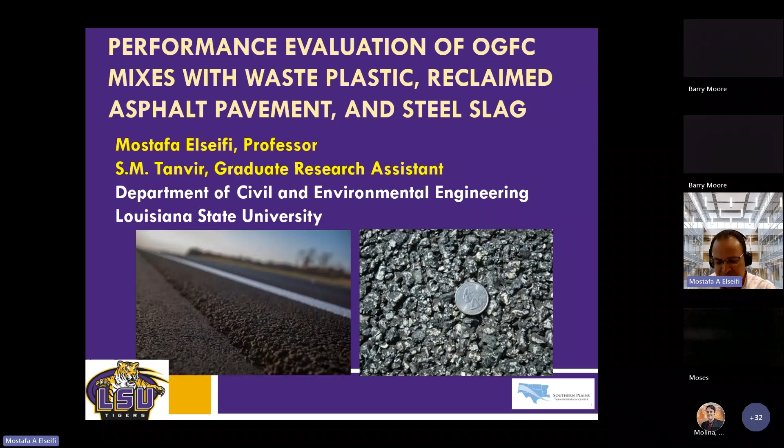To start with a little bit of introduction, OGFC has been around for quite some time. It has many functional benefits for the user. It drains the water very quickly, and it also reduces the noise from traffic. It improves the friction at the surface. It reduces the risk of hydroplaning. So many functional benefits for the user.

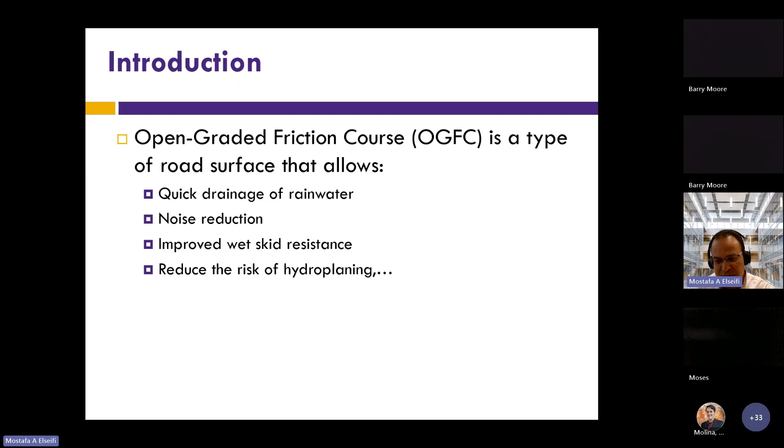However, in terms of performance, it does not last as long as regular dense graded hot mix asphalt. The reason is that we have a very high air void content. This air void content reduces the film thickness of the binder, which leads to premature raveling and stripping of the mix. Also, the high air void, even though it works very well at the beginning, tends to get clogged with dust and debris over time, which may reduce the permeability of the mix.

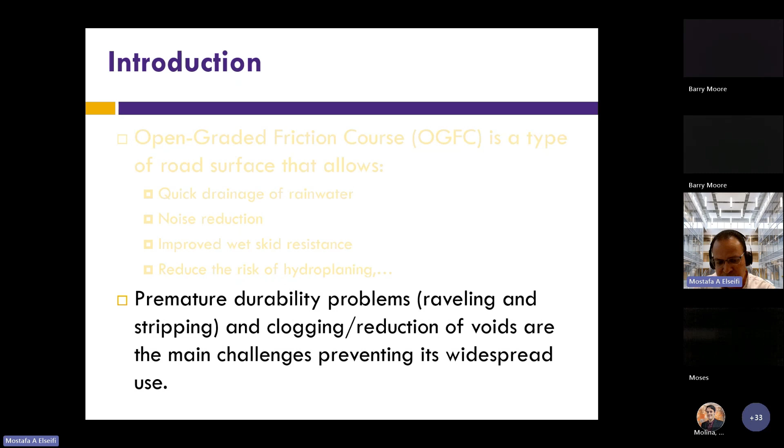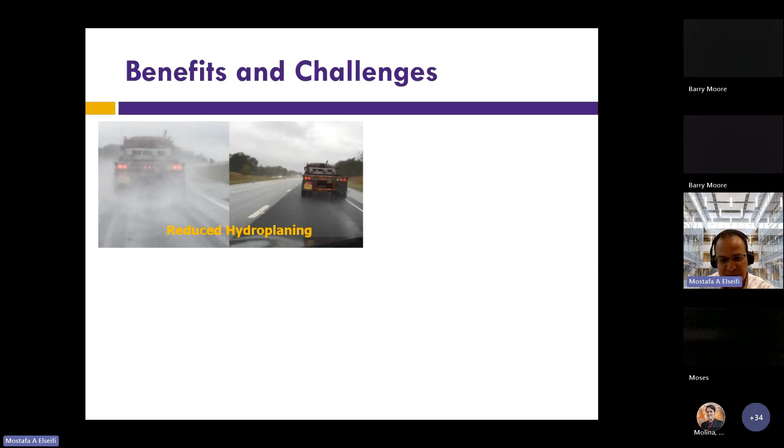So these are some pictures taken in Louisiana. You can see the benefit of OGFC in reducing splashing and hydroplaning, especially in the event of heavy rain, which we have very frequently in Region 6. Also, another study has looked at the amount of accident rates. You can see OGFC, shown in green, has a much lower accident rate than regular mix. So that's also an added benefit of this mix.

In terms of durability, these are examples of raveling of the mix. It's usually constructed with a very thin thickness, which again makes it very susceptible to raveling. We also have seen in the literature early top-down cracking from this mix. So it has a lot of performance issues, and we cannot really argue about that.

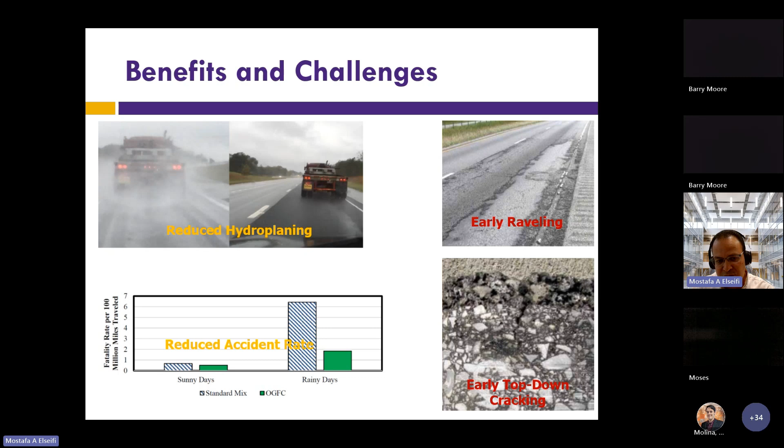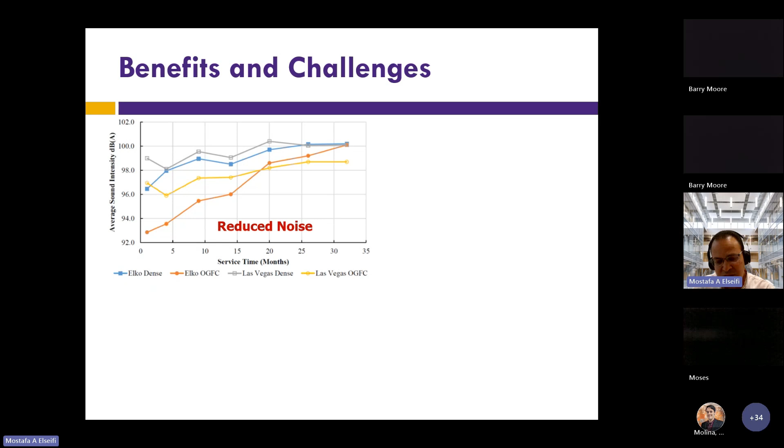In terms of reduction of noise, this study was done in Nevada. You can see the very clear reduction in noise, which again is a very important issue, especially in urban areas.

As I said, the cost of OGFC is higher than dense graded mix. This is mostly due to the higher asphalt content, and again, this is also an issue that we are going to discuss in this presentation.

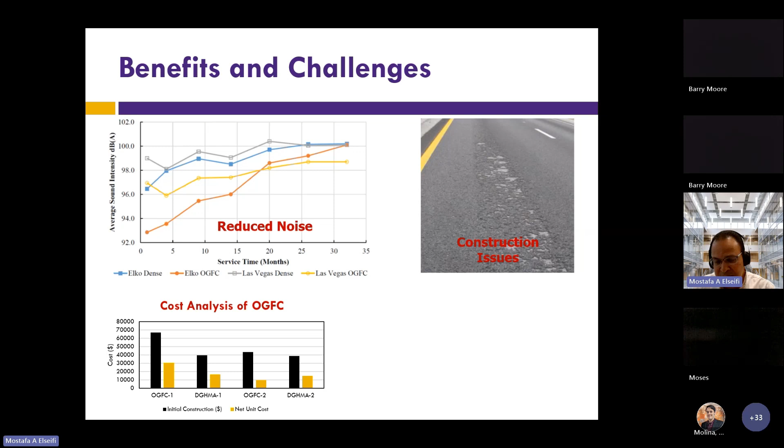In terms of construction, again, the mix is very thin, and you can end up with some problems after construction. This requires a very skilled contractor that has experience in constructing and compacting this type of mix.

And again, the reduced permeability was looked at in the literature. You can see it does decrease over time, mostly due to debris and dust in the air void, and also because of the consolidation that happens to the mix over time.

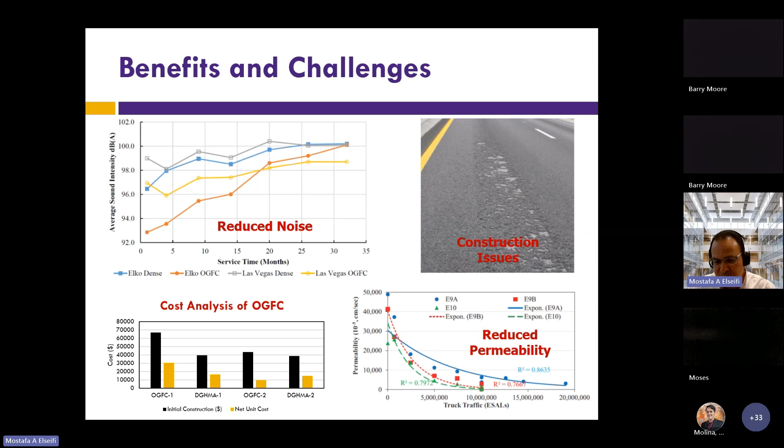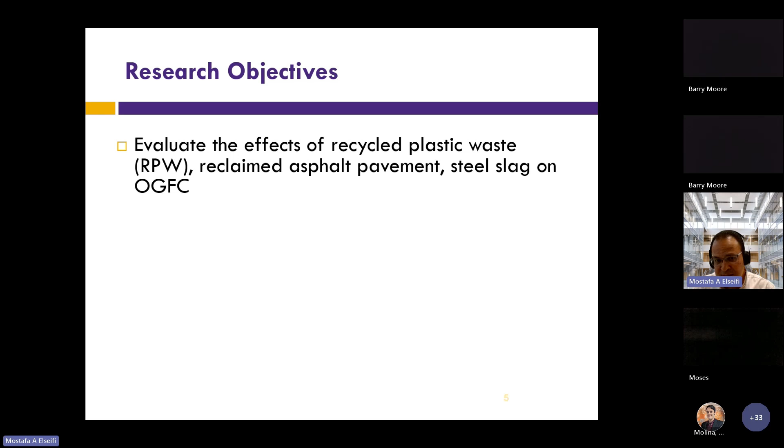Our objective was to look at innovative methods to reduce the cost while improving the performance of this mix. We looked at the incorporation of recycled plastic waste, reclaimed asphalt pavement, and steel slag. We also looked at the use of high polymer modified asphalt binder and hydrated lime, which we use as a slurry in the mix. As part of our state's practice, and I'm sure other states in the region, none of these additives are currently allowed or used in OGFC.

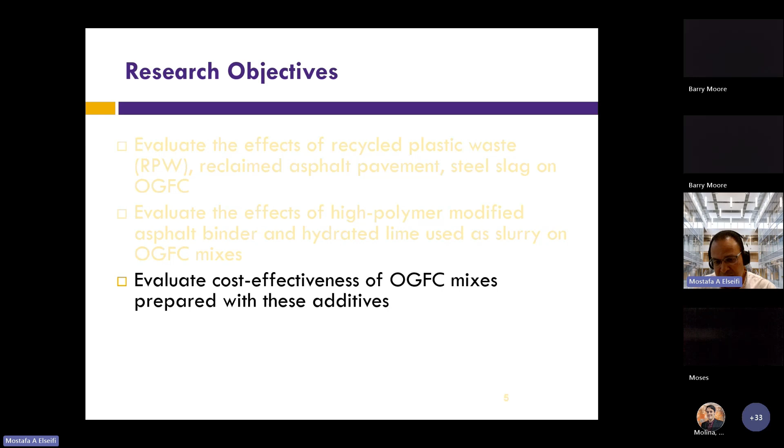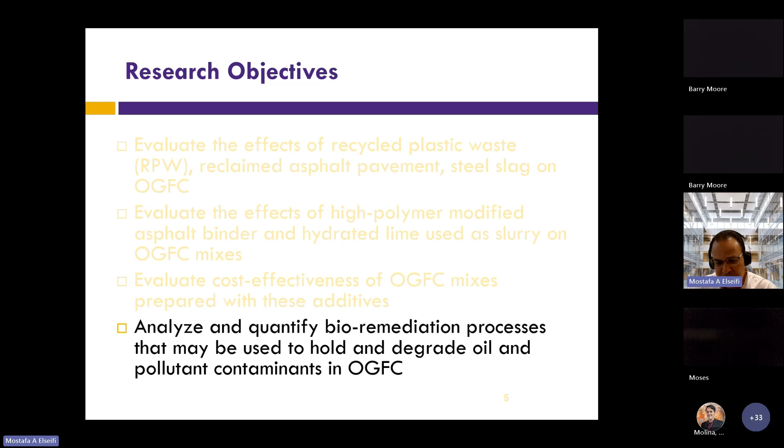Then we looked at the cost effectiveness. After we assessed the performance, we looked at cost effectiveness, which is a very important issue when dealing with mix production and construction. We also looked at this because it has been claimed that OGFC can degrade pollutants. So when you get pollutants in the mix, can it help degrade them? For example, when you have motor oil on the surface, can OGFC help with this type of contamination? I'm going to show you the results.

For the methodology, we started with a literature review, which I'm not going to present here due to time constraints. Then we selected the material, based on a wide range of attempts, so I'll just show you the final product. Then we designed and prepared the mix, did the laboratory testing, performed the performance analysis of the results, and also did the cost analysis.

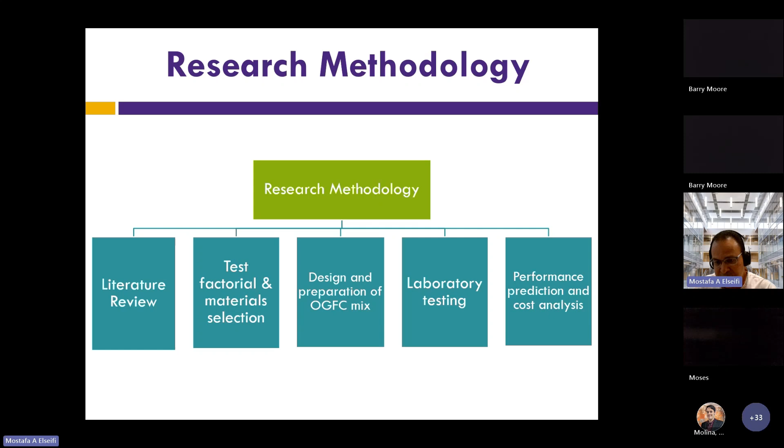The mix that we used was provided by the Louisiana Department of Transportation and Development. This is a mix that is actually approved by the department and has been used in roads. It's a mix that has been designed and approved.

Some of the features I'm highlighting in red: the nominal maximum aggregate size is 12.5, which is what we currently use in the state. We have two sources of aggregate, so it's a very simple mix design, but it meets the specification.

We use PG 76-22M, which is polymer modified, at 6.5% content. We have fiber to reduce drain down. We also use ZycoTherm, an anti-stripping agent, which also has other benefits for the mix. You can see that the air void of the control mix was 22.6. In Louisiana, we require an air void of 18 to 24, which is tremendously high compared to dense graded hot mix asphalt.

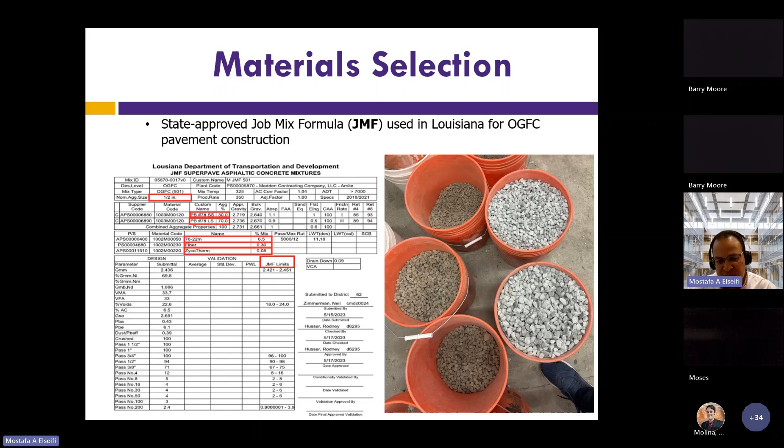The additives that we used: we used recycled plastic waste, which you can see in the picture here. It's high density polyethylene, and we replaced it at a content of 3.75% of the total weight of the dry aggregate. This has not been attempted before in OGFC, so it was something new for us.

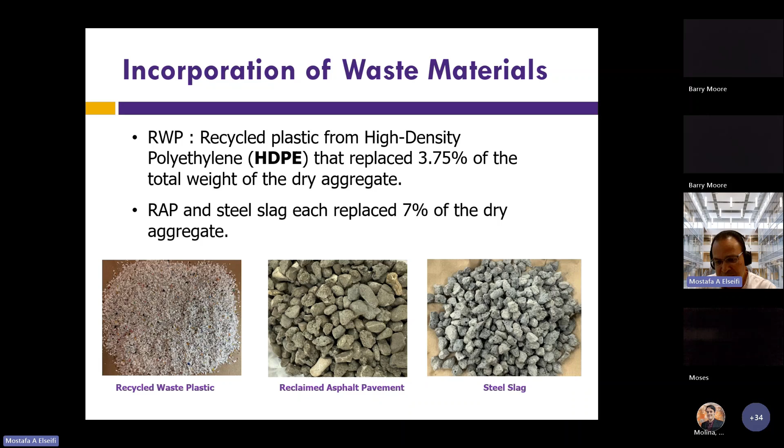The reclaimed asphalt pavement, or RAP, you can see in the picture here. We use it at a content of 7%, and we also use steel slag at 7% of the dry aggregate.

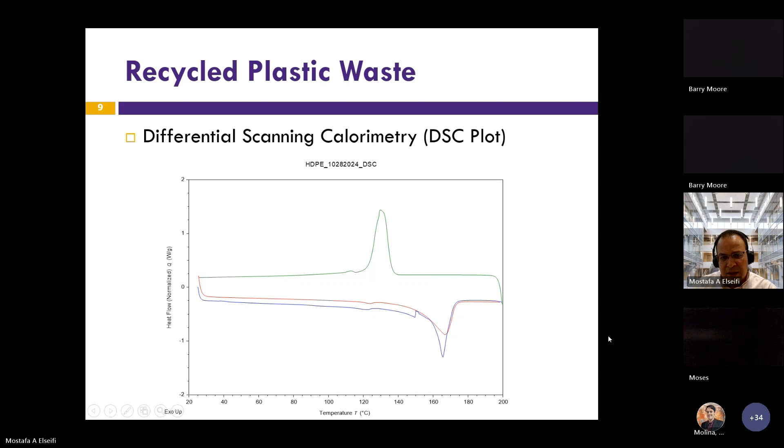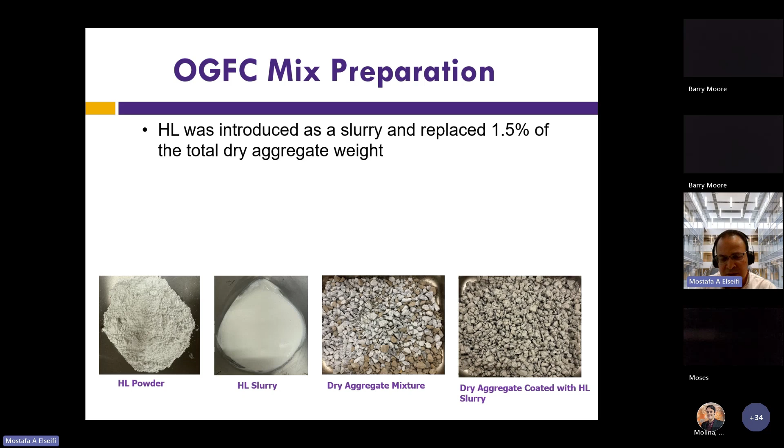For the slurry, we used hydrated lime as a slurry, which is the preferred method to incorporate hydrated lime. We mixed it with water at a ratio of 1:2, then blended it with the dry aggregate, as you can see in the picture at the bottom. After the aggregate is adequately coated with the hydrated lime, we placed it in the oven overnight at 110 degrees Celsius.

For the high polymer modified binder, we started with a base binder of PG5828, and it was modified with polymer at 7.5%, so it's higher than PG7622. This binder is slightly more expensive than PG7622, but we'll look at the cost at the end of the presentation.

ZycoTherm is a very effective anti-stripping agent that we added to all types of mix. In Louisiana, we have the second largest rainfall in the United States after Hawaii, so you can imagine how much rain we're getting. It's very important to use anti-stripping agents in all our mixes.

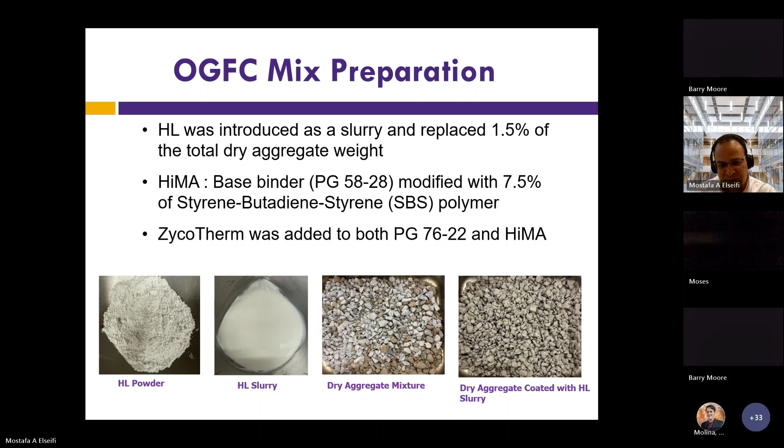These are the six mixes in our factorial. CM stands for control mix, then RAP, which incorporated 7% RAP. SS means steel slag, RWP means recycled waste plastic, HL means hydrated lime, and HiMA means high polymer modified asphalt. These are the six mixes we incorporated into our test factorial.

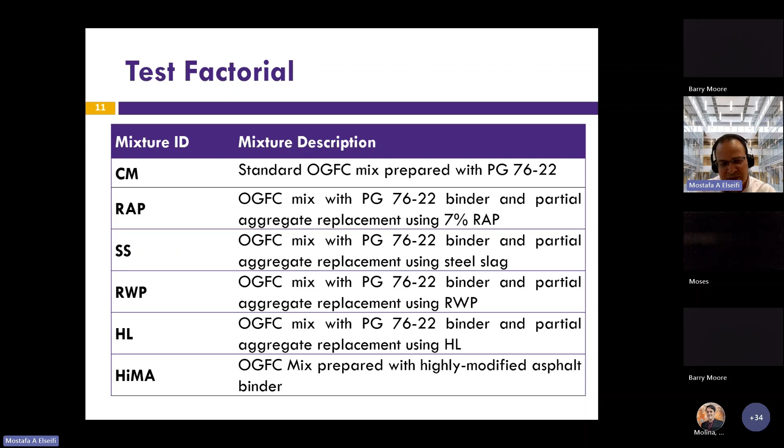The tests we did included volumetric measurements: we measured the air void and the permeability of the mix based on the Florida DOT test method. There was a large NCHRP study, 1-55, that recommended a minimum permeability of 164 feet per day. The drain down test was conducted to assess how much asphalt will drain during production. We also looked at the compaction energy index, a method to assess how much compaction effort would be needed during mix compaction.

That's a very important factor in terms of how much fuel you will consume and how much time you will need to achieve the desired air void.

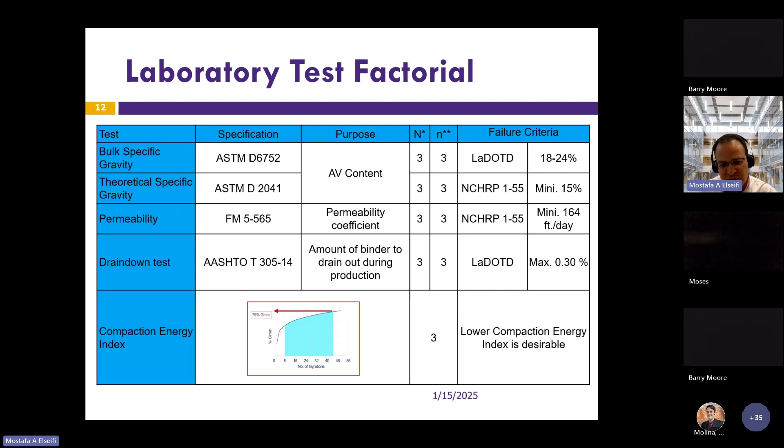In terms of performance, we conducted the Cantabro abrasion test, a very important test to look at the raveling resistance of OGFC. We conducted the rutting test based on the Hamburg wheel tracking test. We conducted the IDEAL cracking test (IDEAL-CT) to look at the cracking resistance of the mix. And we conducted the modified Lottman test to look at the moisture resistance of the mix. These four tests really give you a comprehensive assessment of the performance of the mix, and that's very important.

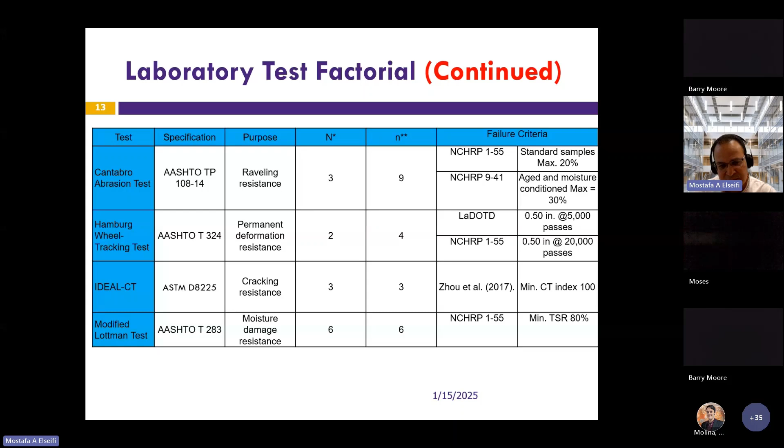The Cantabro abrasion test is highly recommended for OGFC because it is very prone to raveling. It subjects the mix to a significant effort to cause raveling and provides a very clear assessment of this failure mechanism. You place your specimen in the LA abrasion drum shown here, without the steel balls - that's a small modification. Then you conduct the test for 10 minutes and measure how much aggregate or mix loss you had at the end of the test. Again, this is a very important test to assess the OGFC mix.

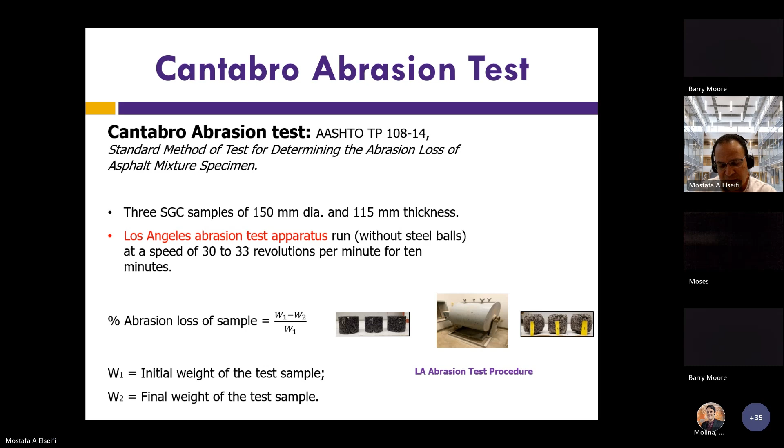The compaction energy index is measured based on the gyratory compactor. We plot the percentage GMM versus number of gyrations, then calculate the area under the curve, and this gives you how much compaction effort you should expect during the compaction of your mix in the field.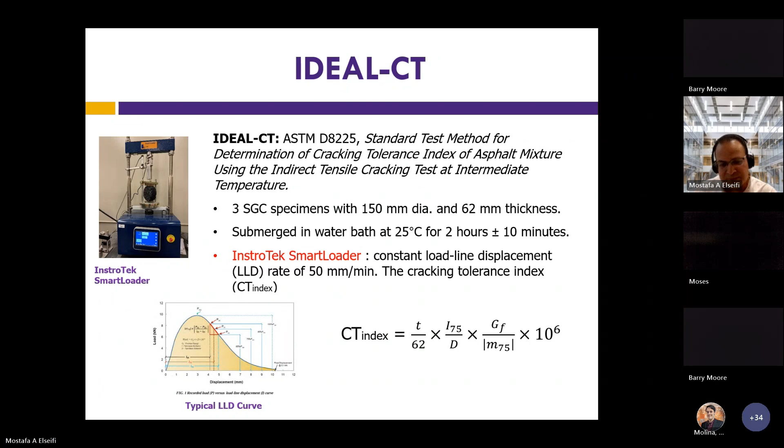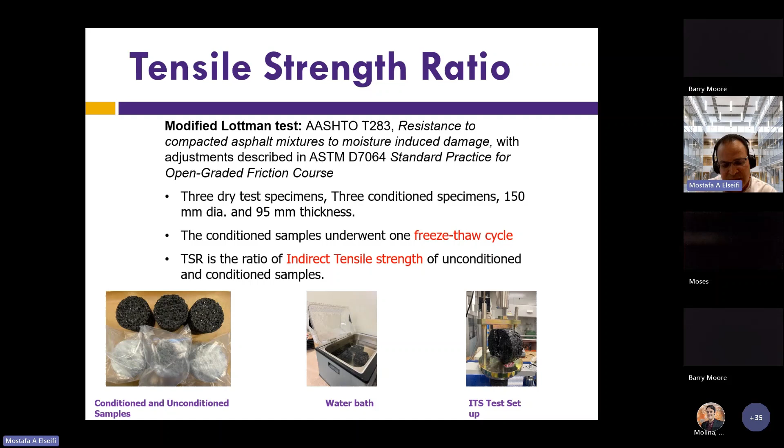The tensile strength ratio, or the modified Lottman test, consists of testing three specimens conditioned and unconditioned. You calculate or measure the indirect tensile strength of the unconditioned and the conditioned specimens, and the ratio of strength between the two gives you an indication of the moisture damage resistance of the mix. For OGFC, NCHRP 155 recommended a TSR of 0.7. ASTM recommends a TSR of 0.8. The state here in Louisiana doesn't use the TSR for OGFC, it uses the boiling test. But this test that I'm showing here is more scientific, and that's why we use it in our assessment - we aim to achieve a TSR of 0.8 for our mix.

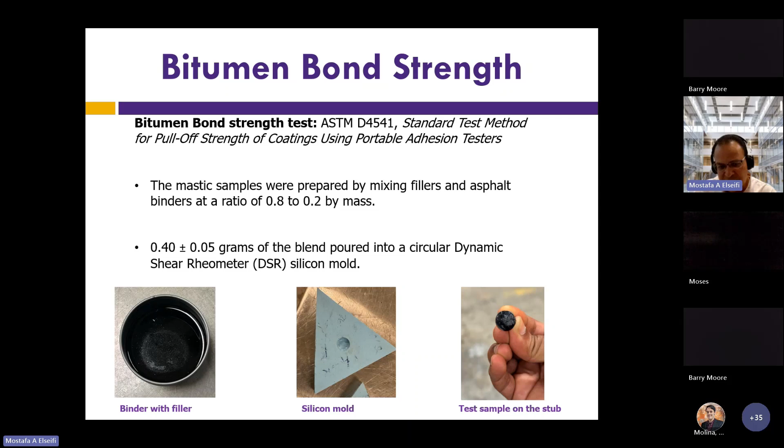The final test that we did is called the bitumen bond strength test. We wanted to look at the effect of the different binders and fillers obtained from these different modifications on the strength between the mastic and the aggregate. It consists of mixing the binder with filler, then pouring it into a DSR silicone mold. After that, you place your sample at the bottom of the stub, then push it onto an aggregate sample as shown here, and pull it at a loading rate of 150 psi per second, measuring the pull-off tensile strength.

This test is done under dry condition and after wet conditioning. The wet conditioning consists of submerging the specimen in distilled water at 40 degrees Celsius for 24 hours. We measure the loss of bond between the dry and the wet conditions, giving us an assessment of the strength between the mastic and the aggregate - a very important property that relates to the adhesion strength achieved in the mix.

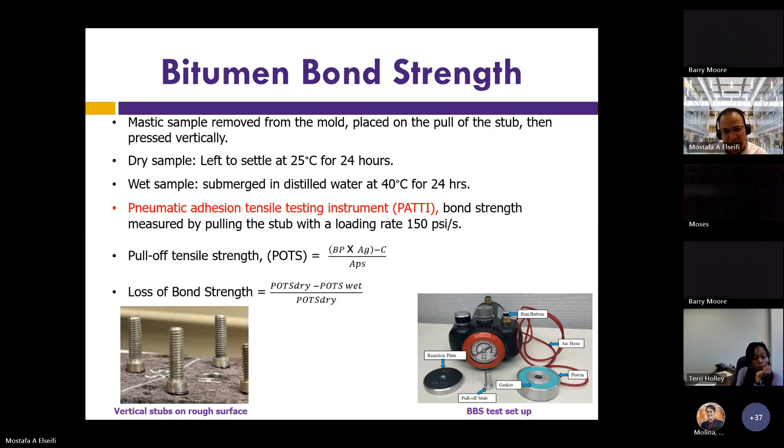Before I show you the results, let me show you how we are presenting it. We did a statistical analysis using an ANOVA analysis at 95% confidence. The null hypothesis is that there is no statistically significant difference between the different mixes. We also did a Tukey Honest Significant Difference, HSD, test at a 95% confidence level.

I'm going to show you the results. If you see the same letter on two mixes, that means these mixes are statistically equivalent. If you see different letters, for example A and B, that means the mixes are statistically significantly different. This is a very important process because you don't want to just look at the results and use your engineering sense to assess the difference. A statistical assessment is much more useful - if you see different letters, that means the results are different. We tend to put the letter A for the best performance, B for the second, and C for the less, and so on.

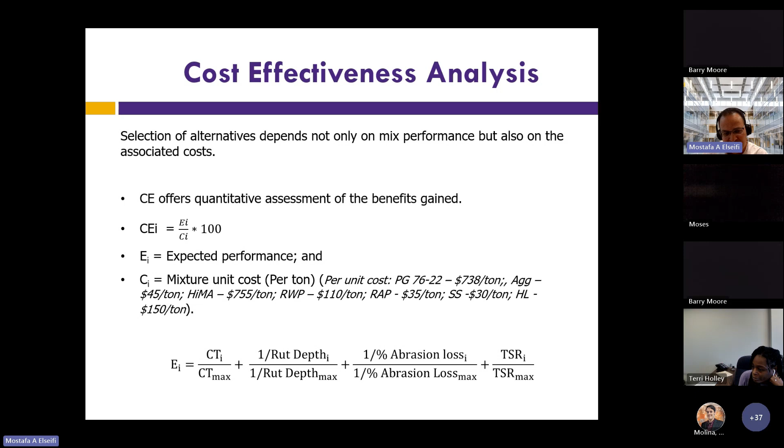To determine the cost, we obtained the cost from different sources - from contractors, from the DOT, mostly from the Louisiana region, but also from region 6 in general. And the expected performance, you can see it at the bottom. We combined the four performance measures that we have: the CT index of the mix divided by CT maximum, the rut depth, the Cantabro loss, and the TSR. All of these give you the effectiveness of the mix. This method is relatively simple, but in my opinion it's very accurate because you have the performance and the cost of the mix in one ratio.

To look at the biodegradation, basically what we did was we had a dense graded specimen and an OGFC specimen. We subjected them to two types of contaminants: heavy metals, including lead, copper, zinc, and cadmium, and motor oil. We used EPA method 160.2 to assess how much biodegradation you get in the specimen when you pass these contaminants through it. You have this filtration process and the biodegradation. The good thing about OGFC is that it has this high storage capacity of contaminants, which allows the biodegradation of these pollutants. I'm going to show you the results.

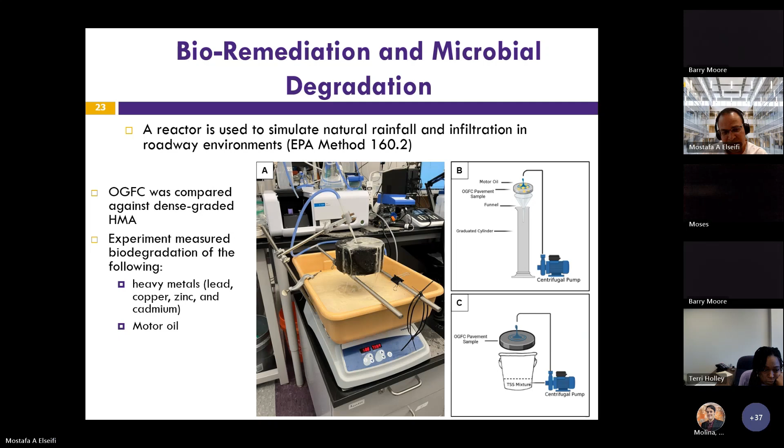Showing you the results of our investigation: the air void of the different mixes. We have six mixes, and we defined the abbreviations before. CM means control mix, SS means steel slag, RWP means recycled waste plastic, RAP means reclaimed asphalt pavement, HiMA means high polymer modified asphalt, and HL means hydrated lime. In terms of air void, we want to achieve between 18% and 24%. Anything in this range is acceptable from a specification point of view. The blue line is what is recommended by NCHRP 155. You can see that all our mixes satisfied this range, which is important to do because you want your mixes to be comparable.

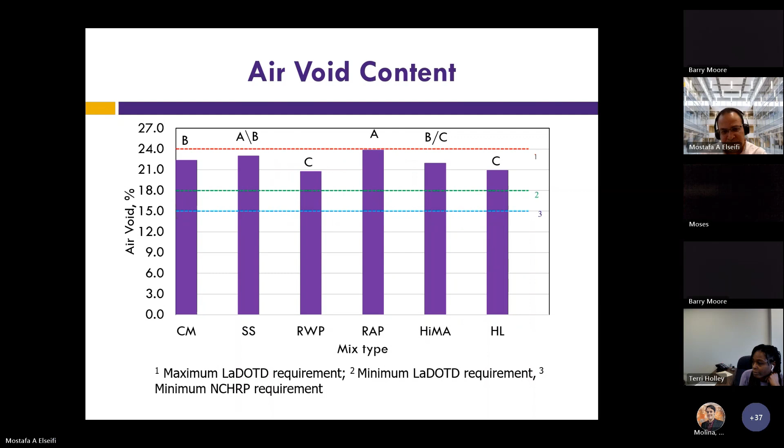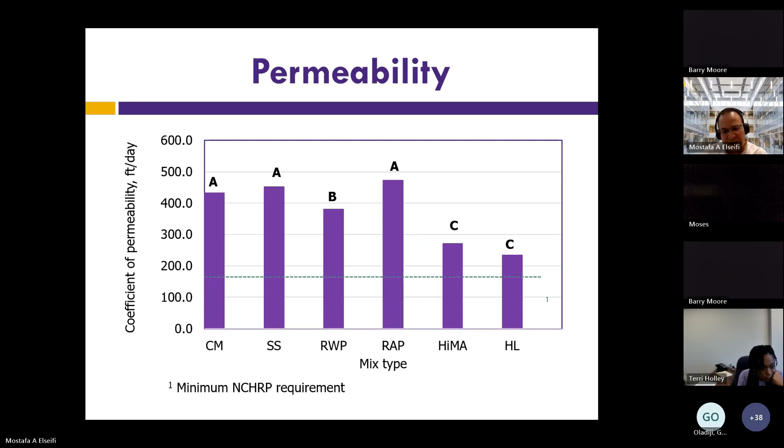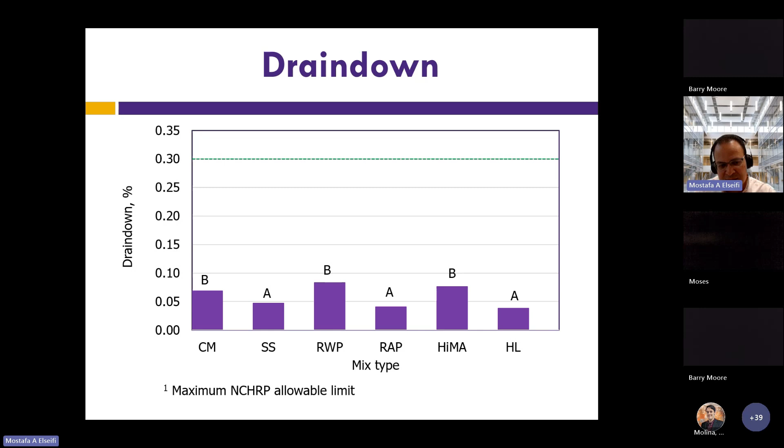The drain down, as you can see from this slide, was not an issue. We had fiber, so that really helped. The maximum drain down that we wanted was 0.3%, and you can see that all the mixes were less than 0.1. So that's also very good news.

The compaction energy index showed us very interesting results. The control mixture had the highest compaction requirement, shown here on the left - it had this C grouping. In contrast, the hydrated lime, followed by the HiMA and the RAP, had the lowest compaction energy requirement. Why is this the case? This relates to the viscosity of the binder. It's possible that hydrated lime facilitates the compaction process, and that's why it had the lowest compaction energy requirement.

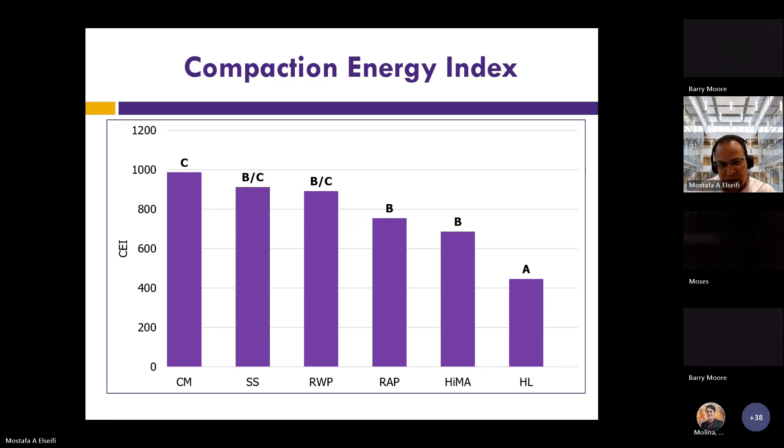If we look at the rutting, you can see that at 5,000 passes, all the mixes passed, which is the top figure here. All of them had a rut depth less than 12.5 millimeters. However, at 20,000 passes, we started seeing differences between the mixes. Again, the control mix and the RAP mix had the highest rutting. On the other hand, the steel slag and the hydrated lime had the lowest rutting. In between, we had the recycled waste plastic and the HiMA, which was below the 12.5 millimeter threshold, so they passed this factor.

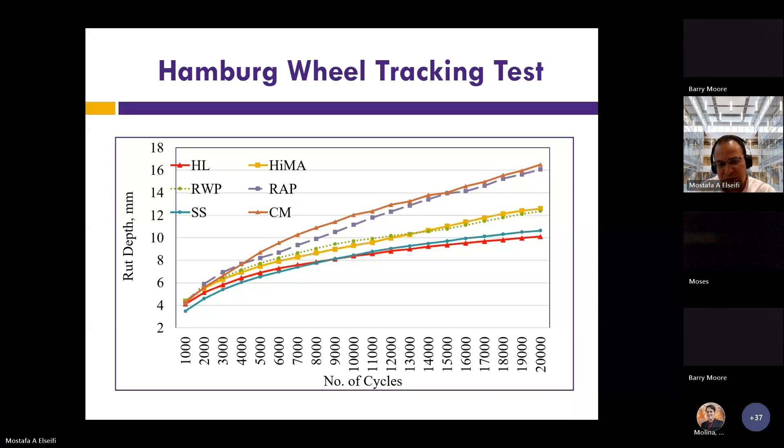In terms of the bitumen bond strength, we found that the highest strength was obtained for the HiMA mix, you can see it here. We have two columns because one is dry and one is wet. The second best performance was the RAP and the hydrated lime in terms of bond strength, followed by the recycled waste plastic and the control mix, and the steel slag was the lowest performer. It's possible this is due to the nature of steel slag, which is a slightly different material than the others, which may affect the adhesion strength between the binder and the aggregate.

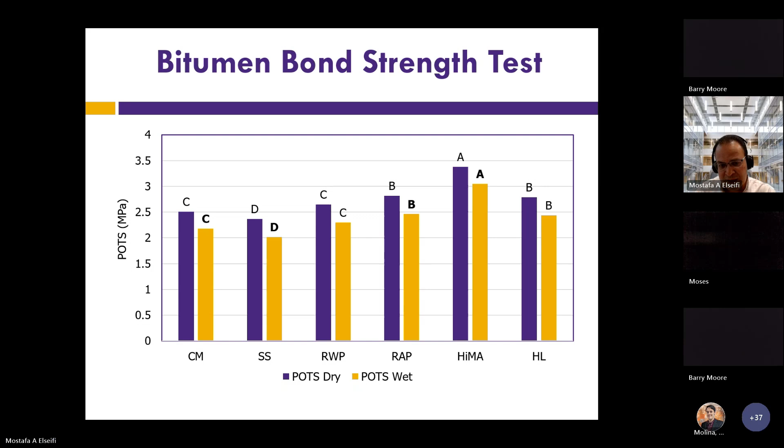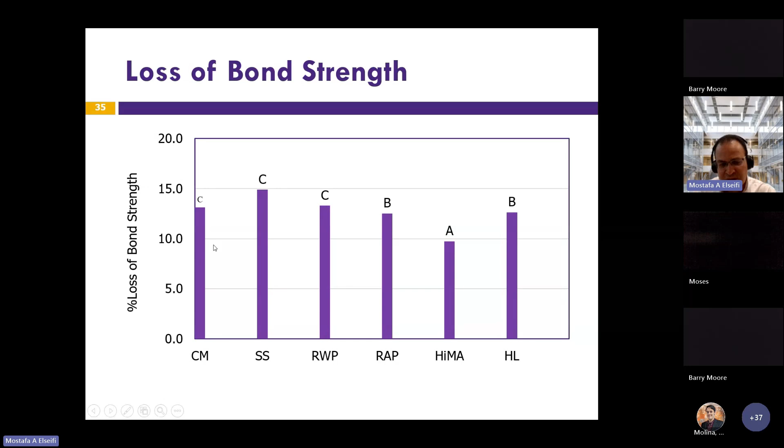In terms of bond strength, the best performance was the HiMA, which did not lose more than 10% after conditioning, followed by the RAP and the hydrated lime. Then the third group was the control mix, the steel slag, and the recycled waste plastic.

This slide, in my opinion, is the best, most important slide. Again, we said that the cost of HiMA was slightly more than the PG 76-22, but when we looked at the performance as compared to the cost, the best two performers were the HiMA and the RAP mix. This accounts for both the cost of the mix and its performance. It was followed by hydrated lime and steel slag, then recycled waste plastic, and finally the most costly mix when you look at performance is the control mix. So again, looking at the initial cost is highly misleading — the control mix may be cheaper than other types of mix, but when you look at the performance, it's actually more expensive.

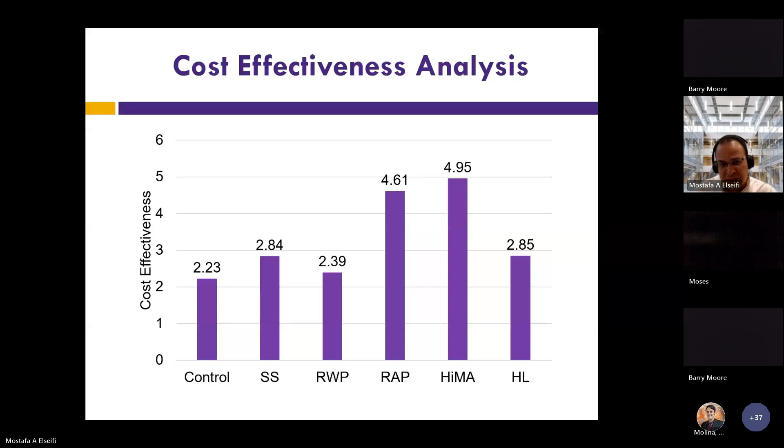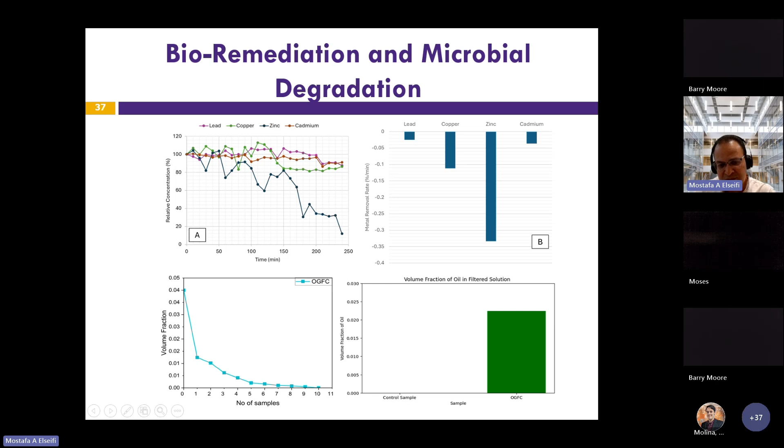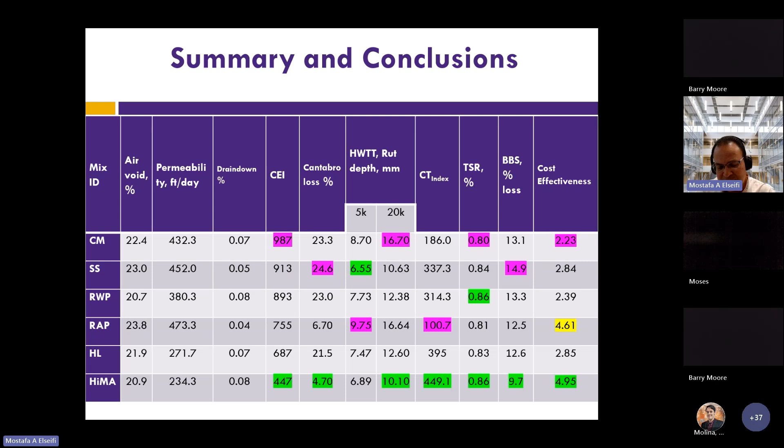In terms of cost effectiveness, HiMA was the best performer, followed by RAP. RAP is usually not considered in OGFC in Louisiana and other states, so this is something worth looking at, because when you talk to contractors, they always tell you OGFC is very expensive, and that's a major challenge.

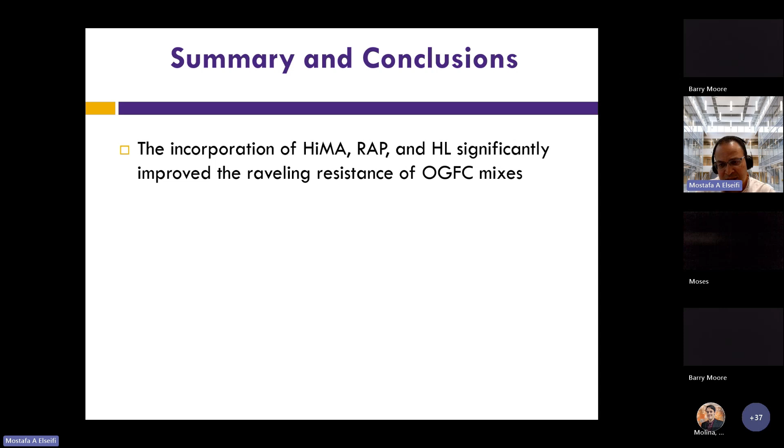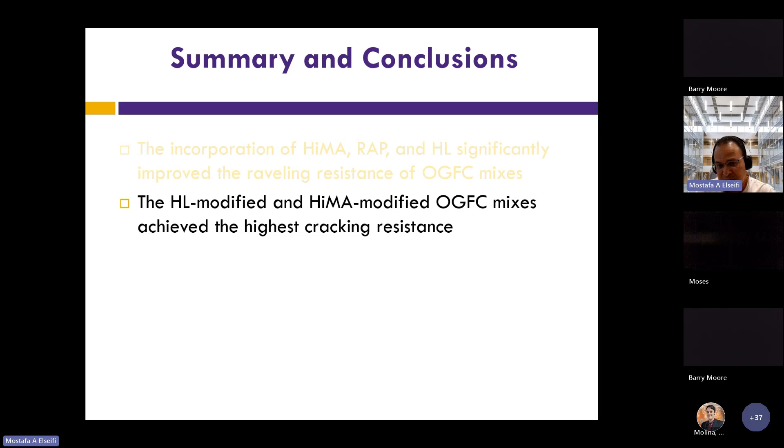In conclusion, we found that the incorporation of HiMA, RAP, and hydrated lime significantly improved the raveling resistance of the mix. Also, hydrated lime and HiMA achieved the highest cracking resistance for the mix. All the mixes met the rutting criteria at 20,000 passes except the RAP and the control mix. The mix with highly modified asphalt binder and RAP was the most cost effective, with a very clear distinction in cost effectiveness.

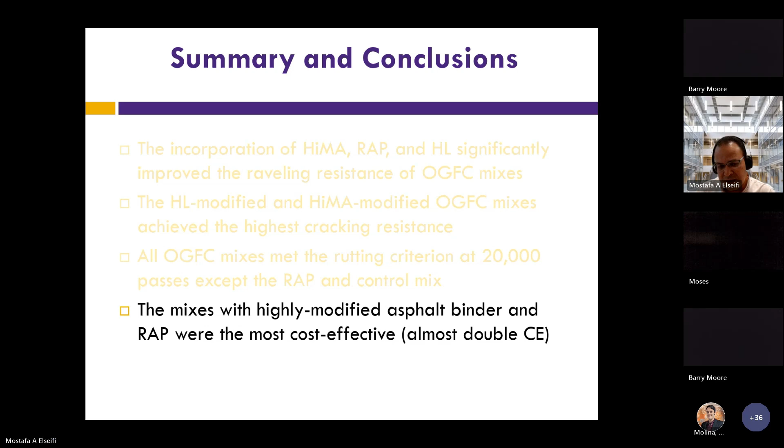The mix with recycled waste plastic performed equivalently or slightly better than the control mix. So again, that's something worth considering for environmental reasons—we found that the mix with recycled waste plastic performed slightly better than the control mix.

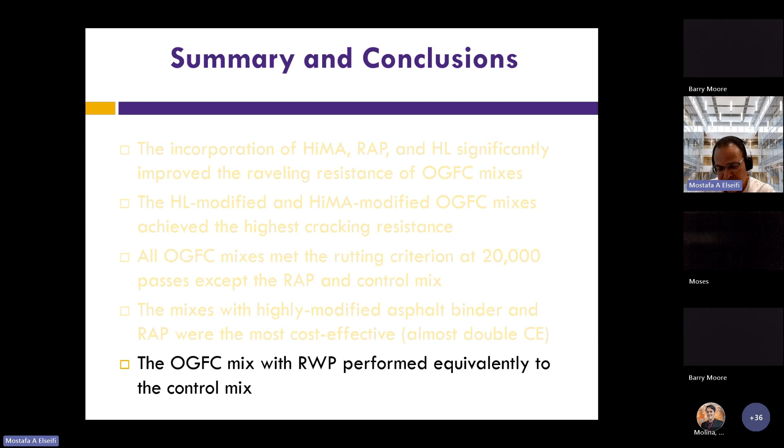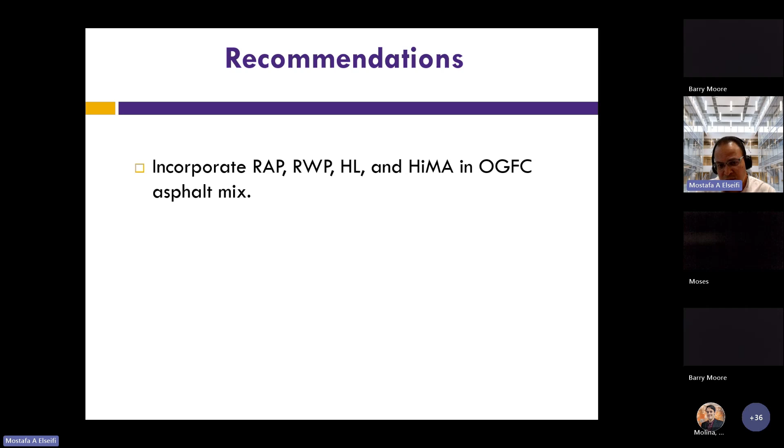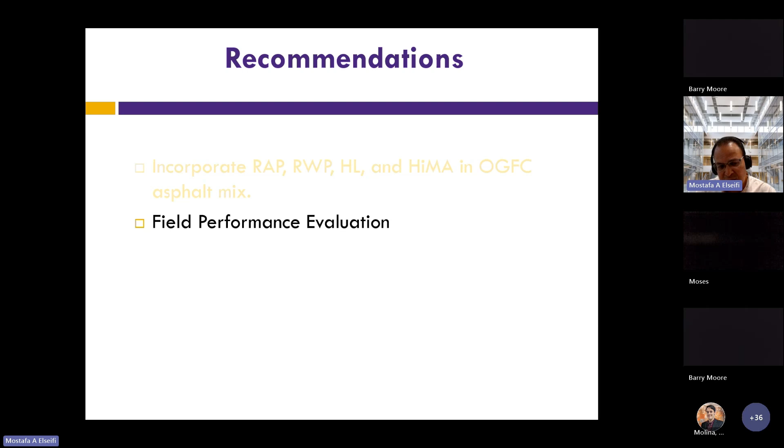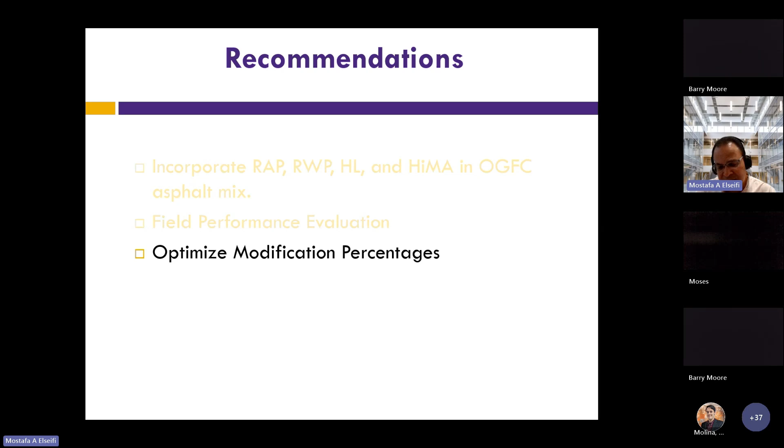In terms of recommendation, we have good confidence in incorporating RAP, recycled waste plastic, hydrated lime, and HiMA in OGFC. We think the next step would be field performance evaluation—building test sections and looking at the field performance of these mixes to see how it goes. If it confirms our laboratory results, that's a very positive sign. We would also like to look at different percentages for these additives, which is something we did not examine and is worth considering in the future.

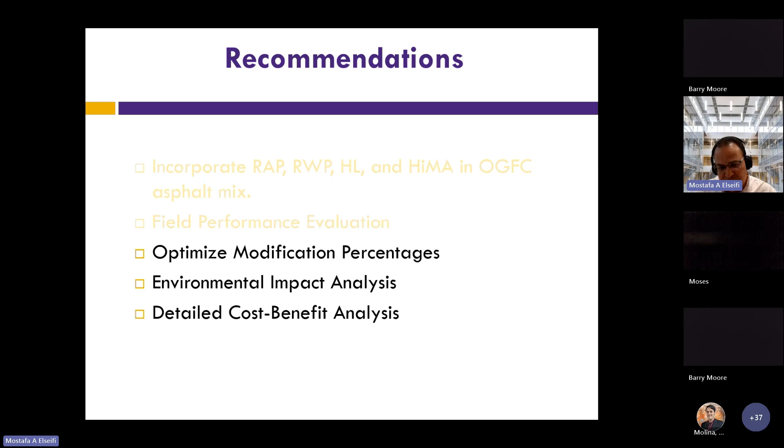We should also conduct an environmental impact analysis to look at the environmental benefit of these different additives. And if we're able to do the field performance evaluation, we should associate it with a cost-benefit analysis, so we can get a more accurate cost evaluation of these different types of mixes.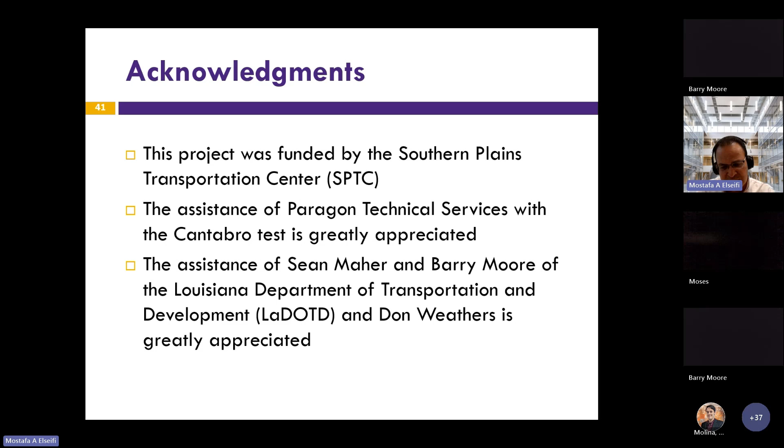So with that, I would like to answer any questions that you may have.

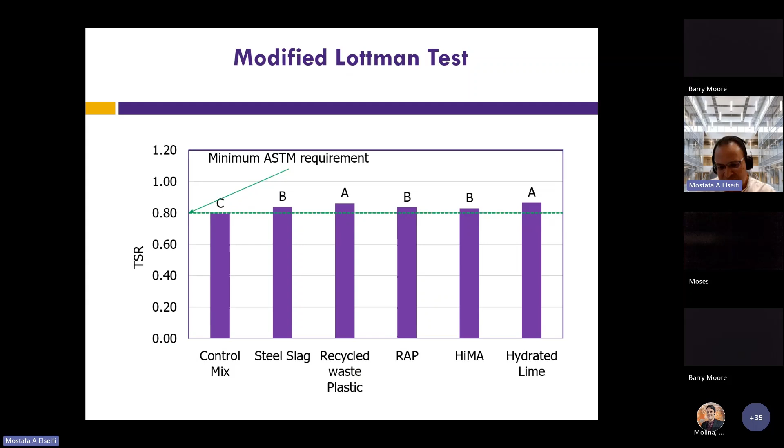Next question: are all 4 of the tests of equal importance in performance? This is a good point. I would think raveling is probably the most important one. If I go back to this slide and look at the raveling results, you can see that RAP and HiMA had exceptional performance compared to the other mixes. So this is probably the most important test, followed by the IDEAL CT—because the cracking susceptibility of the mix is very high.

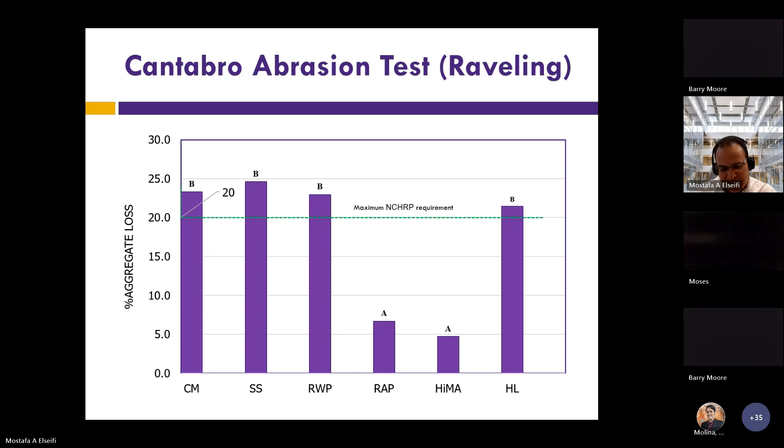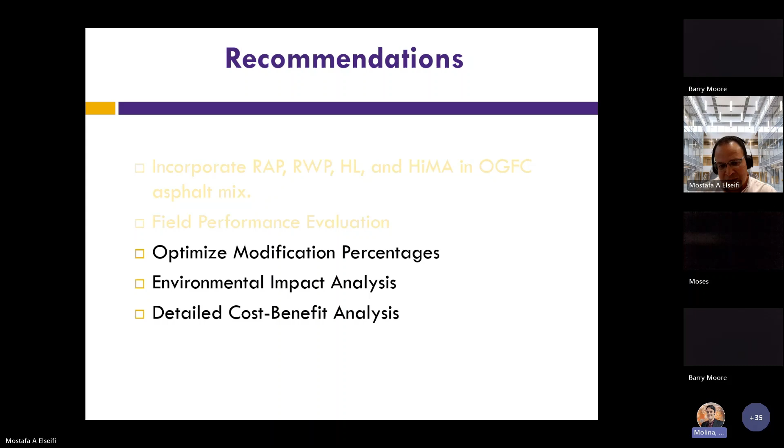We have one last question. In Oklahoma versus the wet climate of Louisiana, would it be better to study fly ash instead of hydrated lime as an additive? That's a good point. I think the concrete industry is using a significant portion of fly ash. There's type C and type F, and I think type F is a good one. We were actually sometimes trying to use fly ash in our research and had problems finding it because the concrete industry seems to be using most of it. So even though fly ash is a byproduct, it would be more environmentally friendly.

Again, you should expect a similar result, but maybe slightly inferior to hydrated lime. Hydrated lime has a very high strength activity index—that's what allows us to create this slurry and get very strong adhesion. Fly ash I would expect to perform similarly, but again, there's the availability of the byproduct, and it has a slightly inferior strength activity index than hydrated lime.